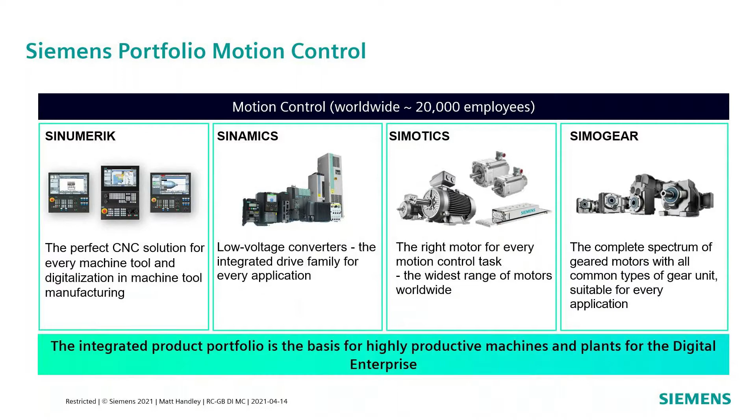Let's break that down a little bit further. G115D, which we're going to discuss today - you'll see a little image of it in this distributed drives part - but our portfolio really goes across the plane. We have what we call standard performance drives, our basic V20, a low cost but still good performance drive that fits in the palm of your hand. And then we have that range going through to drives as big as the wall behind you, up to 1.2 megawatt - actually up to 4.7 megawatt in 690 volts. So we do go through some high powers. Then we have the G platform, so G120, G120C, 130, 150 in there. I'm not going through all those today, but that's a very scalable platform.

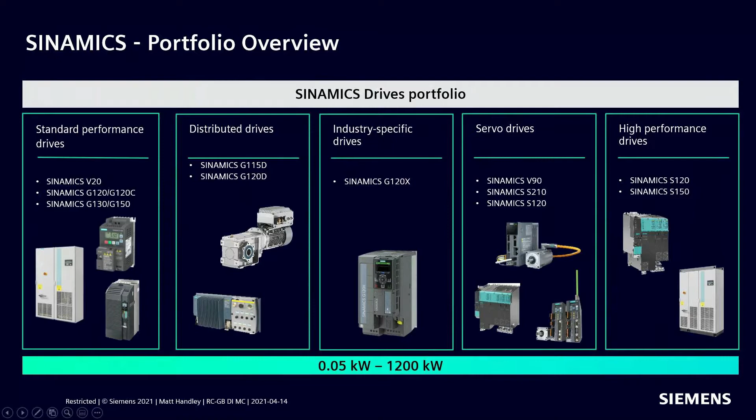We also have distributed drives, more specific products which are mount-at or mount-on applications, which is what we're going to discuss today. We have industry specific drives, G120X, which is our fan pump solution - this has a lot of parameters, features, functions inside it specific for fans, pumps, belt break detection, cavitation detection, deragging and such like. And then we have a servo drive platform, our V90, S120, so basic servo through to very high-end, very complicated interpolation activity with S120. Then we have high performance stuff here, 150 and 120. So you can see a vast range of products which the markets are operating in. We are number one globally in the markets we're operating in, very successful, as I'm sure you're aware.

But we are here today to talk about the G115D. Why? Because it's our latest and greatest. It was launched back in January this year in the UK, October globally, but we delayed it into January in the UK for many reasons. And we are now seeing some great success with this - the uptick in customer inquiries and sales is way beyond what we expected. We're blowing targets out of the water at the minute because it really is hitting lots of sweet spots.

So I'll give you a short break from my monotonic voice, and I'll just let Kirsty play the first video, please, which is a marketing video for G115D, and it brings out some of the key features, which I'll break down as we go through the presentation. So Kirsty, if you could play the first video, please.

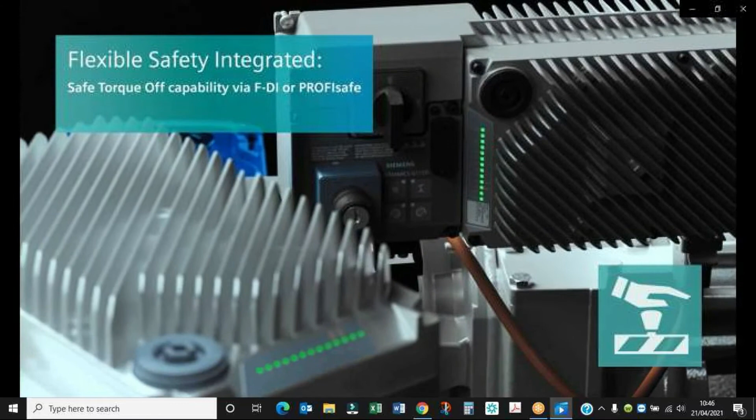Brilliant, it works well. Technology works, it's good when it works. So if you make me presenter again, please. Kirsty would be appreciated.

It's really good. I think you can see my screen. I can see my screen, so that's good.

Okay, so you can see where the marketing budget's gone on our iPhone-esque G115D video. I reiterate, this is a specific drive for conveyor type applications where you have the mount-on solution, which is you mount the drive onto the gear motor, specifically a Siemens gear motor, or we mount it at the conveyor and then onto any third party motor, asynchronous motor or permanent magnet motor.

So when we designed this product, it wasn't just blindly designed. We like to tell a story really why this product was designed, and we're looking at it from a perspective of the customer. So put yourself in the customer's position, and a lot of the challenges we see and a lot of challenges that we face, we know G115D has been designed for and certainly exceeds.

So the main one really is the need for a control system that's easy to install and manage. Now, I'm hoping that you are aware of Siemens as a business and what we offer and our go-to-market strategy with our TIA Portal solution. And if not, then there's a great video I'm going to show in a couple of minutes to show the power of integration. So it's that need for a control system that's easy to install and to manage.

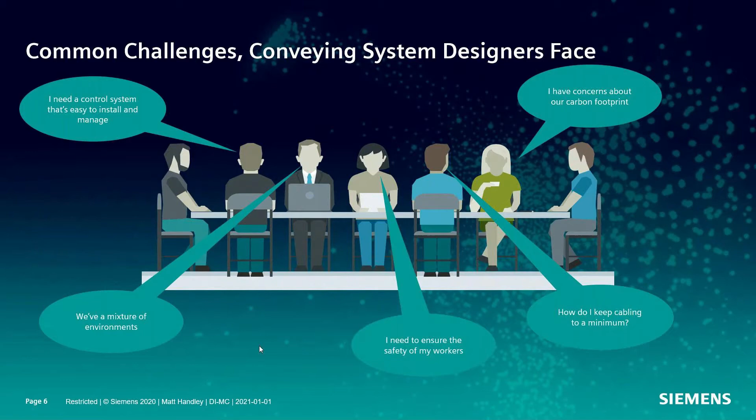So let's take a look first at how this drive will help you to reduce commissioning time, because the big value proposition we have as a business, I said before, is our integration.

We know that we can use third-party products. We know that we can try to get 3 different devices talking non-natively together and spend a lot of time with 3 different software packages, making sure the cabling's okay, having to make special cables up possibly. It can be a real pain.

The beauty of coming to Siemens and buying into the TIA Portal and PROFINET is it's one cable that plugs into any device, and then one programming software that allows you then to program all devices together.

So I'm going to play, Kirsty will play for me, another video from my colleague C. Roberts. C. Roberts is one of our applications guys for drives, he actually heads up the applications team for our drives engineers. He will now discuss with you the merits and the benefits of using the TIA Portal. So please play the video, Kirsty.

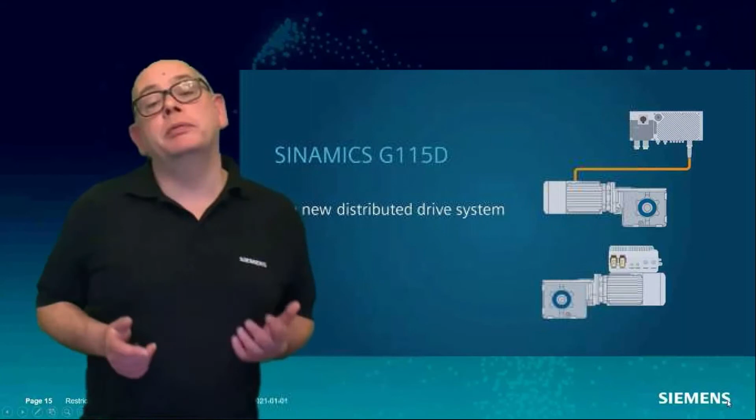Thanks, Matt. You've already highlighted some of the key challenges facing our customers in the target industries of the G115D. So let's take a deeper look at some of the technical features to address this. The G115D makes use of pre-made, tried and tested plug-and-play cables, which can greatly reduce installation times. Not only that, it limits the risk of wiring mistakes, whilst also complying with the relevant wiring standards. We can also take benefit from the flexible wiring from the 3 sides.

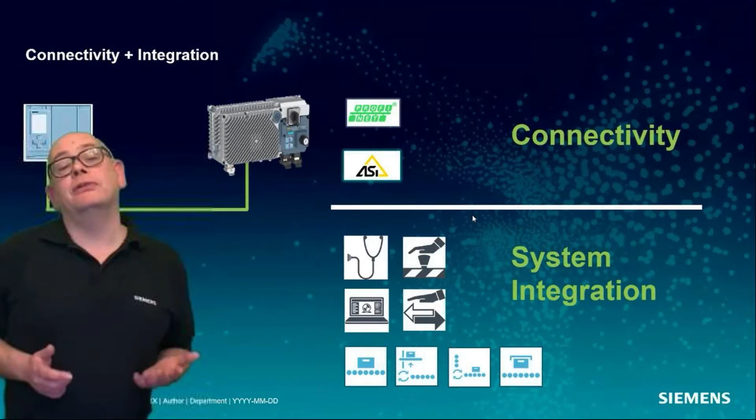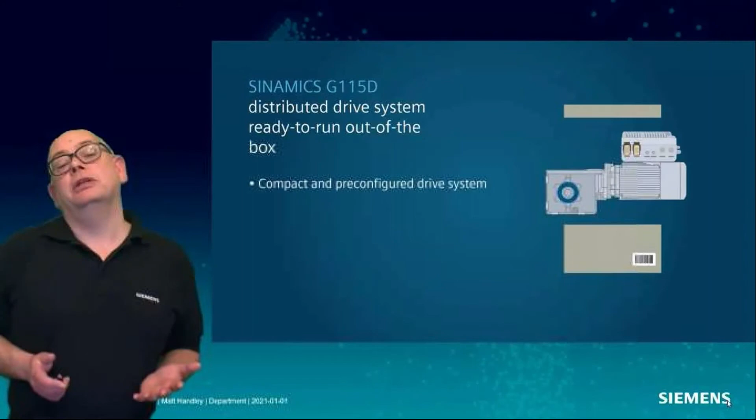In comparison to a third-party drive system, the G115D allows for the seamless integration into the TIA system, which dramatically reduces the setup times. Integration gives the benefits of easy to follow graphical setup wizards, pre-programmed and system tested blocks, integrated safety function, and the motor mounted version is parameterized at the factory to match the connected motor and gearbox. And due to the nature of a distributed drive system, the G115D can be mounted anywhere in the factory. To reduce downtime, taking advantage of zero engineering diagnostics is key.

Diagnostic information is passed seamlessly from the drive up to the PLC. Taking advantage of the network drive, not only do we get the diagnostic information to the PLC, we also get

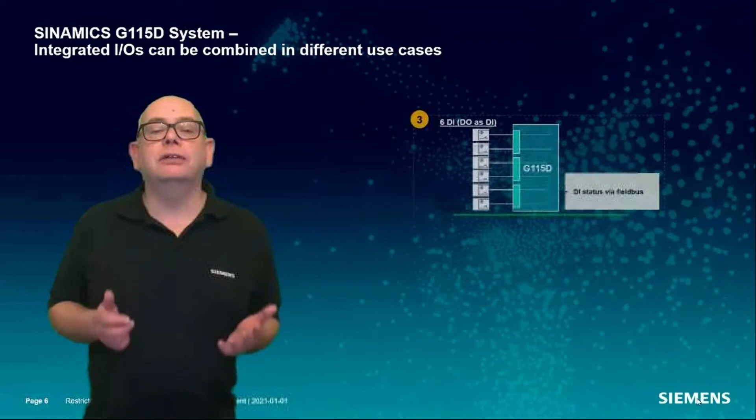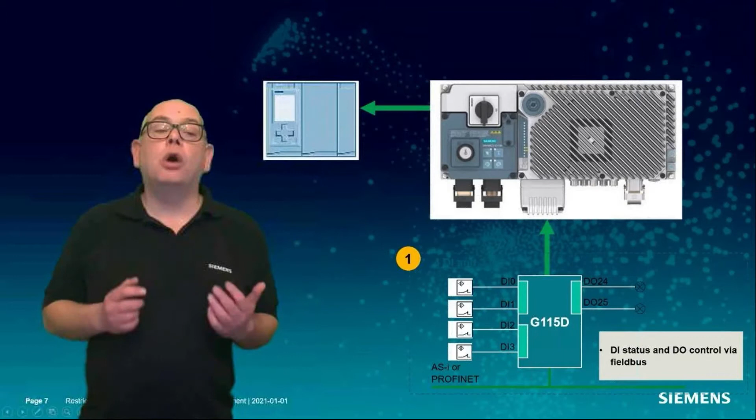the status of the repair switch and the local remote control on board the G115D. In addition, the status of the I/O on board the drive is pre-mapped onto the network. Taking advantage of this, we can utilize onboard I/O to control field sensors and actuators.

This removes the need for extra modules and remote I/O stations, which reduces complexity, field components, and also the cost of the system. Within intralogistics, baggage handling, automotive, food and bev, we are looking at conveyor technologies.

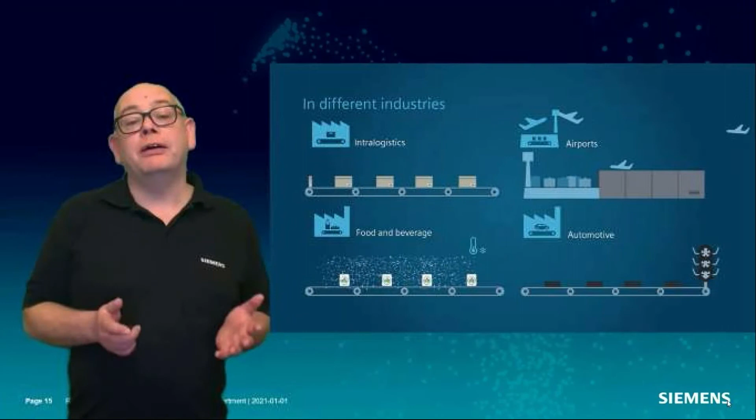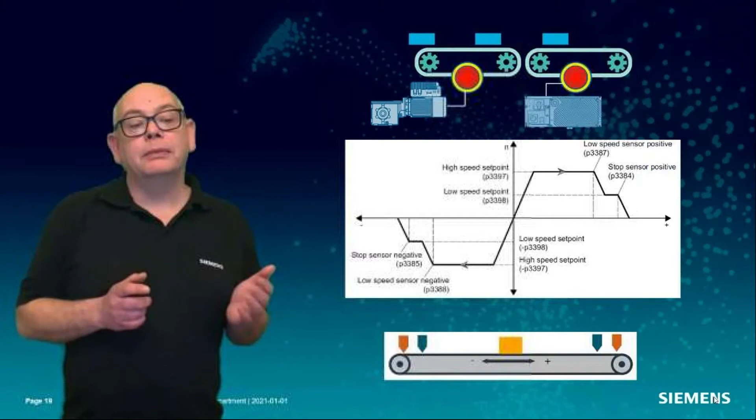So the G115D has the conveyor technologies built in. This could be for corner turntables with lifts, or travel trolleys. Having these functions built in on board eliminates network latency, giving the required repeatability when stopping. All can be easily set up in Startdrive or the Smart Access module.

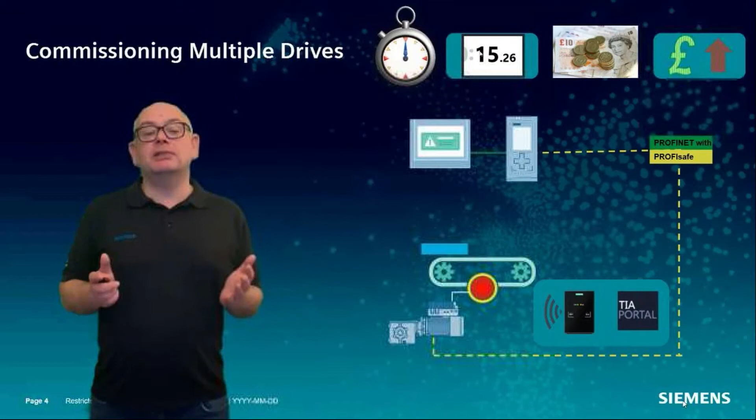Let's take a look how the G115D can help with commissioning challenges. We already benefit from network routing, which allows us to access and make changes to the drive from almost anywhere. This is fantastic, but what if we need to make the same changes to multiple drives?

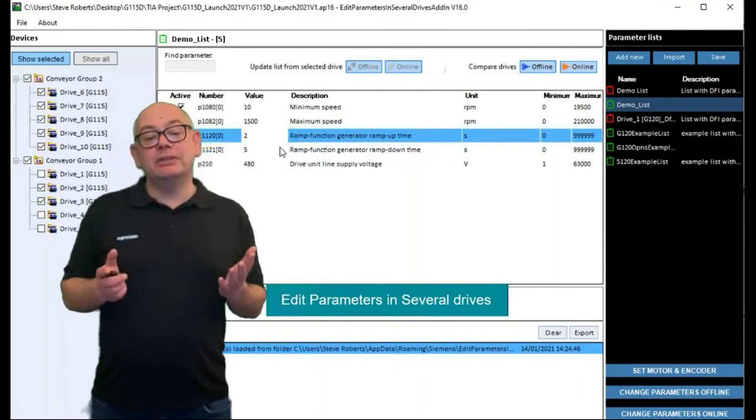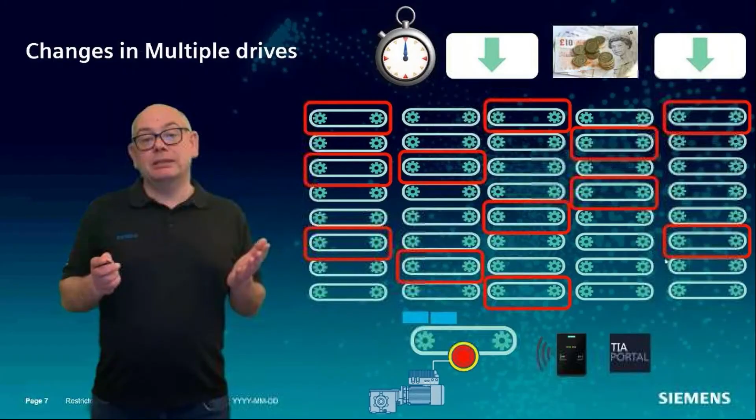So, due to the ease of integration, the ease of installation, the brand new G115D gives benefits of shorter startup times and reduced complexity, therefore saving time, which will drive down costs.

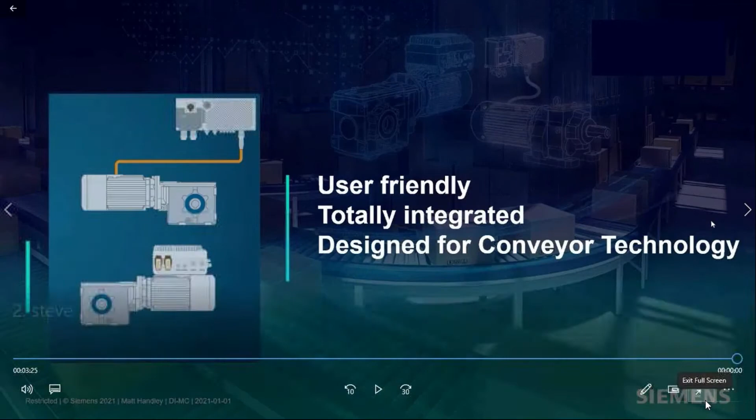Brilliant. Let me present again, please, Kirsty.

Fantastic. So going over there by Stephen, some of the key points he picked out, and said before that the value of the integration versus connection.

The fact that we can use the onboard I/O of the drive, it's got 6 inputs, which you can have as 4 inputs, 2 outputs, so you can configure those freely. But we can drive those from the PLC and map them back into the PLC as free I/O.

So if this drive goes out in the field, we don't then actually need lots of I/O stations, which can be expensive, and again, you're going to kind of wire those back.

Openness, the fact that we can program many drives with the same data. So if I've got 100 drives on the network and I want to say all those 100 drives now need the same acceleration, deceleration, and maximum speed time, if that's individual, that's a lot of time I've got to burn doing that.

With openness, I can simply say this drive, this drive, this drive, or all of the drives, have this information, bang, and it's gone down the line straight away. So some real, some fantastic features there.

TIA integration itself, of course, is a big time saver, but with predefined function blocks, you haven't got to start writing hard coding things. The predefined function blocks are there.

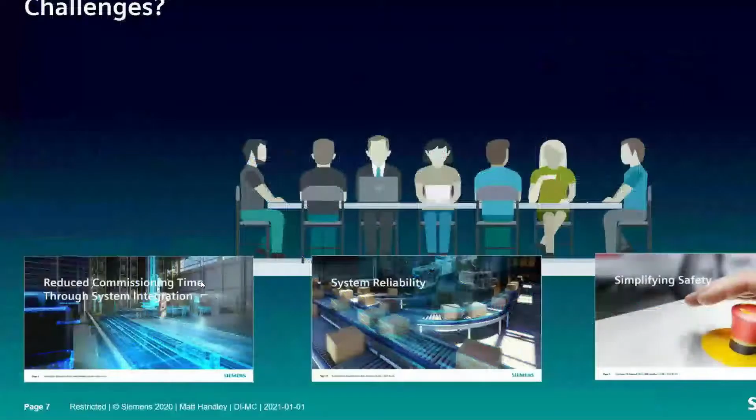One of the other concerns that was raised when you're looking at designing the conveying system was safety. So how do I make sure safety is simple yet robust?

I'm going to play you the final of my trilogy of videos, and this is colleague James Fletcher. James Fletcher works in the same team as Steve does. He will discuss with you now the key advantage we have in safety, and it's a unique proposition we have as a business, as Siemens, in the safety world, and it really does, again, so it's all about saving you, the customer, time and money. So please, Kirsty, play the last of the 3 videos.

So recently, I was asked about the new SINAMICS G115D drives and how this can benefit our customers. And for me, a great feature of this drive, as well as all the SINAMICS G drives really, is that you can get them with safety integrated, meaning you can hardwire safety signals like e-stops directly into the drive control unit for safe shutdown.

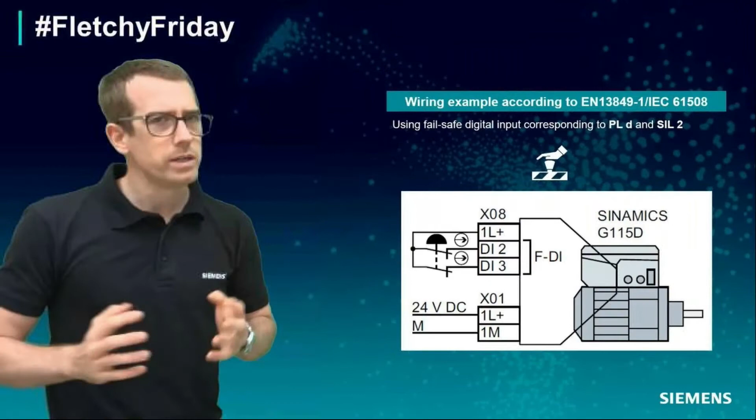But what's really cool about this is that you can send these safe signals back to a centralized PLC via PROFINET. So in a distributed drive application, like conveyors, where you're bound to have e-stops dotted around the system, to reduce electrical complexity, you could just be wiring those e-stops directly into its nearest drive.

And PROFINET will send those signals back to the centralized PLC, where a little bit of safety logic means whenever one of those e-stops is pressed, it won't just shut down the drive but any drives you wish to group it with.

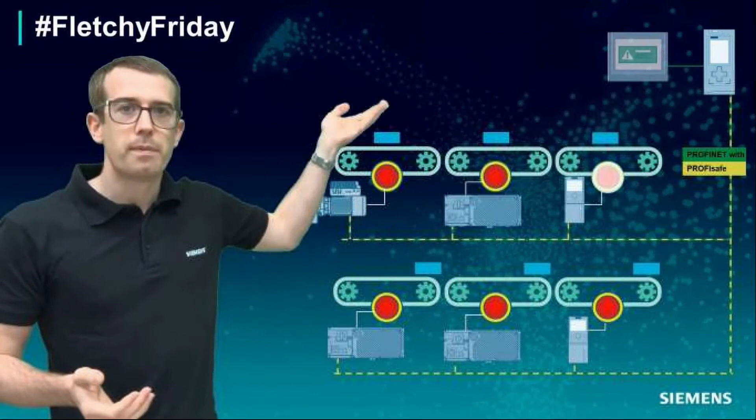Plus, with diagnostics integrated in our safety application code with ProDiag, you can get alarm messages automatically generated to conveniently pop up on the HMI and tell you exactly which e-stop was pressed. Don't believe me that this application works? I can prove it because I've tested it with my digital twin tools as well. So this shows you the benefits of having integrated motion, integrated safety, integrated diagnostics in your applications, coupled with digitalization, meaning you can reduce complexity, reduce risk, and bring a lot of efficiencies into your applications. We like to call it totally integrated automation and digital enterprise.

Thank you, and forgive the video there for being a bit jerky. It's obviously difficult when you're trying to present over different mediums. The video itself is normally okay, but just bandwidth, etc.

I think you got the message here that our safety approach in the marketplace is unique. It's invaluable really. We don't need safety relays. We can simply hardwire any e-stop straight back into the drive and either have it stop itself under safe torque off, or we can map that back over PROFINET and stop several drives as well. So a real big advantage there. Again, it's that kind of time and money thing and the integration piece, which I think I've hammered home enough now, to be honest.

So the other concern we had, of course, was robustness, reliability, and energy efficiency as well. So the three pillars, let's say, for success are covered along here.

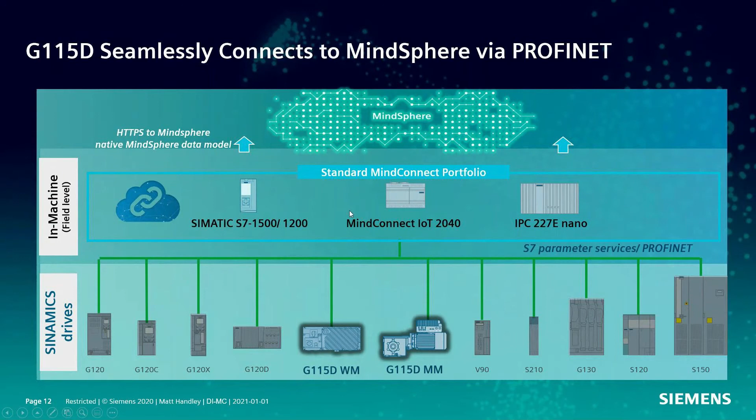And we're now seeing that edge technology not only be in a special box—now that's coming down to our drive platform as well. So over the coming next couple of years, you'll start to see a lot more from Siemens in terms of edge technology, where we have it on board PLCs built into drives, etc. That's coming soon.

So digitalization gives us that kind of comfort blanket, if you will, that we've got this built-in plant reliability, and that's gained through measuring. So you measure, you understand, and you gain insight. Insight's invaluable. Monitoring really is checking against what you've measured and gaining intelligence. The mitigating really is putting in place your mitigation strategies, so you're acting to reduce failures.

That can also help on your stock holding. The days of having a store full of motors, bearings, drives, where it may have failed or been sat on the shelf for 4 years—is it any good? We really start to implement more of these intelligent maintenance strategies.

You can start to say, I'm going to operate a pseudo just-in-time solution, so I can detect when things are going to fail, and then order the bearings up, order the motor up, or order the drive up ahead of time, so it's there on the shelf and hasn't been sat there for 2 years with no idea of its quality.

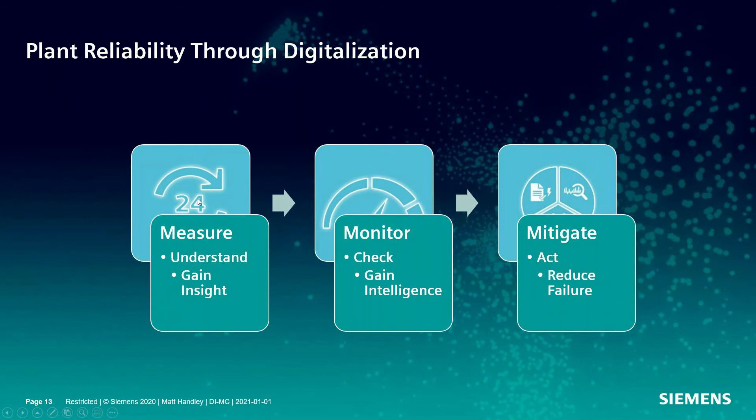With this drive brought to market, of course, you want that arm around you from Siemens to say that we'll look after you. So you'll be pleased to know that we offer up to 4 years warranty.

Standard is 18 months, but you get 6 months free of charge anyway if you register it, and then you can buy either 1 year or 2 years extended coverage, which is between 3 and 5% of the list price of the drive. It's insanely low as a cost, and if you're putting lots of these in on a critical plant, then you get the full global warranty. It's not some hybrid warranty; it's a full global warranty.

You'll see from Siemens that this allows you to ensure availability, reduce your costs, maybe your stock holding costs, and optimize your asset management.

Energy efficiency, we covered that off as well. One of the concerns was, I'm putting all these motors and gear motors on my system—my energy bill is going to go through the roof now. Of course, we haven't got the magic bullet of no energy, but we can certainly reduce that down, and we can get to IE4 plus levels of efficiency.

A lot of people are saying IE5 at the minute. I don't know why, because it doesn't exist. IE5 actually hasn't been released as a norm yet, so how can you comply to a norm that isn't certified. We certainly comply to IE4 and beyond—we go beyond the limits of IE4 as an efficiency norm on the motor.

So we do that through our portfolio of motors. We have, of course, async motors, and we have our sync reluctance solution as well, which sits on the same form factor as this motor will. It offers benefits too, because it's a lighter rotor, so it's more dynamic with less inertia, giving better acceleration and stopping times. It's all around IE3 cost, so it becomes a no-brainer for this application. Definitely worth considering when energy efficiency is one of your drivers. Of course, you can also buy the IE3 solution as well.

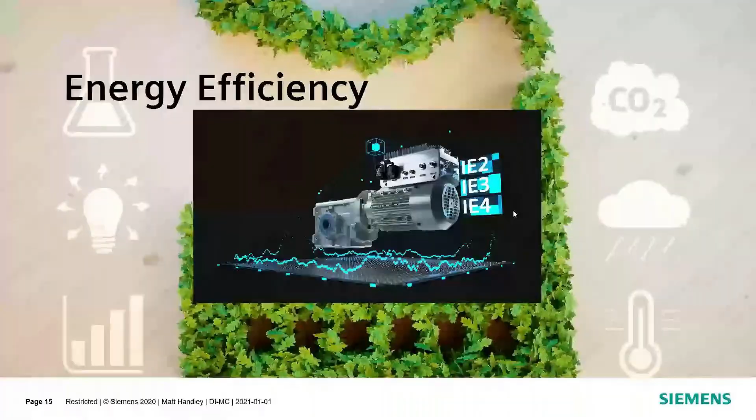So one technical slide, that's it. I'm not going to dazzle you with all those technical features and benefits. I think we've kind of covered those already.

I think the key points technically are the power range: 0.37 to 4 kilowatts for the motor mount version, and 0.37 kilowatts to 7.5 kilowatts for the wall mount version, which is on the right hand side.

Communication - of course PROFINET is built in, and we'd always like to use PROFINET where able, but we also appreciate there may be a third party controller on there, so we support EtherNet/IP and AS-i, or good old IO sort of start, stop and fixed speeds. We support that as well.

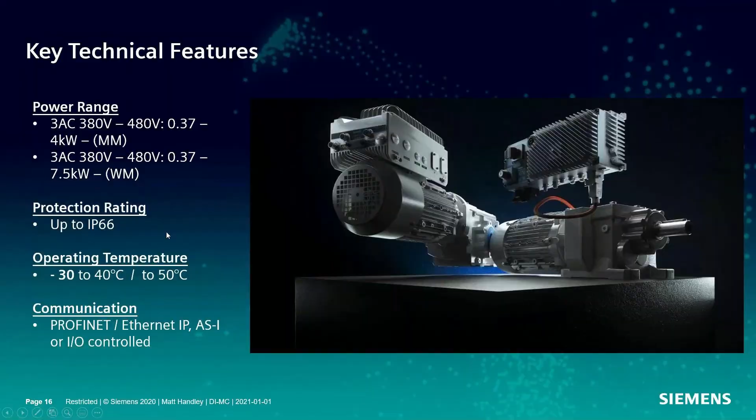Where is it designed for? Really kind of 4 key industries, but we know within that there's lots of OEM machines, and we're seeing a lot of novel uses for this - some into water applications or pumping applications. People are really bought into the key benefits the product can give, but the 4 key marketplaces really are intralogistics, airports, food and bev, and automotive. In that whole ecosystem of those 4 verticals, there's a lot of conveying applications and pumping applications as well, to be fair.

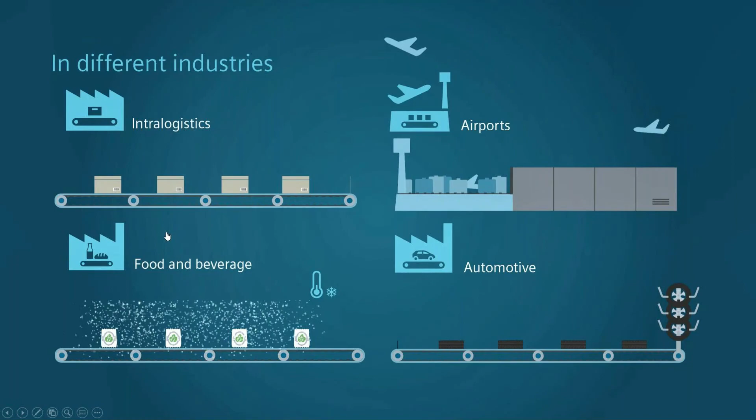So let's start to wrap these things up a little bit. Some of the new features of this drive and feature benefits really are the modular concept. What I mean by that is this electronic box here - if something's going to fail electronically, it's going to be this. Obviously we don't want it to fail, and these things are designed to last, but should the worst happen and this box fail, if you have a mixture on site of wall mount and motor mount, you only need to hold the one box because it fits onto both, which is a good advantage.

Wiring flexibility wise, from the video, if you remember a bit back, we showed that we can wire it from 3 sides, so we can come in and daisy chain. What you don't want is a decentralized system where you put one cable from the control panel to the first drive, then back to the control panel for the second drive, etc. The beauty of this product is you can daisy chain in and out, going from one drive to the next. Daisy chaining obviously depends on the power and how many you can chain together.

Physically, it's a smaller product now, so we know that in the marketplace we have some key competitors - one such is SEW, our friends at SEW - but what we've seen really is that this product absolutely blows them out of the water for the integration piece, and we are physically comparable to that product as well. Better mains behavior - it's not so important if you've got a few drives, but if you've got 2,500 like the ones going to China, then power factor can be an influencer. So this drive has a better power factor, closer to unity.

Easy to use - one thing Steve showed you in his video was that Startdrive integration. If you use Startdrive, then it's a no-brainer for you. If you're not, it's still very easy because it's all pre-written, all macro based, so you're not having to get your manual out and program this P1, P2, P3, P74, P406 to get it working. It's macro based, everything is graphical.

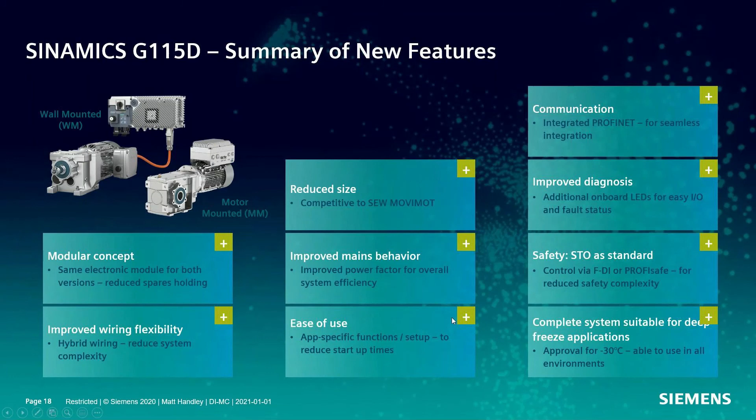And of course down to minus 30 for freezing applications. Globally, it's designed to work all over the world. Again, back to the video, we've got the global certification, motor availability, it's a global motor, so it can work anywhere in the world.

We can achieve IE4, we can also achieve the IES norm as well, IES2, which is a motor drive standard, so we can achieve the highest levels of that, and the standards we comply to are 61800 and 60034 and their various parts. Built-in brake holding, so it's got a built-in brake holder.

It's also got a built-in brake relay, forgive me. It's also got a built-in braking resistor as well, which you can choose to use for different braking needs.

And performance-wise, with a synchronous reluctance motor, what you're getting is a more dynamic solution. So you've got low inertia, which allows us to do some quite accurate open loop positioning with sensorless vectors. So maybe you don't actually need an encoder for some of the stuff that you're doing.

So to support this, we also speak of digitalization, lots of digital tools as well to support this. You can fully size it in our online TIA Selection Tool. Just Google TIA Selection Tool, then you can size the drive and choose the drive that you want.

DT Configurator is more specific. DT Configurator isn't really a sizing tool, it's for when you know what you want. I know I want a 4 kilowatt gear motor solution, so I'm just going to generate a part number. So that's DT Configurator, Siemens DT Configurator.

You'll find that it's all free of charge. Within DT Configurator, you can get E-plan drawings, you can get PDFs, you can get 3D models, it's all there available to you. So you can either go in there with a part number that you know and put it in, or you can generate a part number, then send that to Underwoods to order.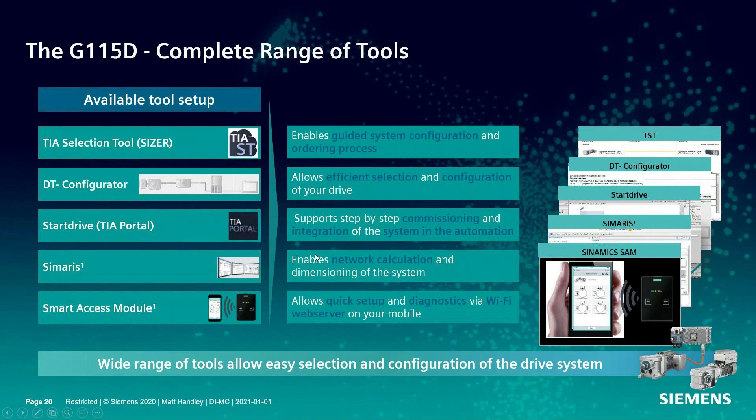So just to wrap up, I think I'm good on time. Easy to use, very robust as a product, down to minus 30 up to plus 55. It's built with Siemens quality. Integrated communication, so fit for digitalization.

Again, it's a buzzword, but I've given you some examples already of digitalization. The condition monitoring piece is free of charge, use the data, you may as well use it. Dedicated for conveying applications, although we have been a bit off piste and used it on a pumping application recently very successfully. And of course, the built-in safety integration with Safe Torque Off and PROFISAFE as standard.